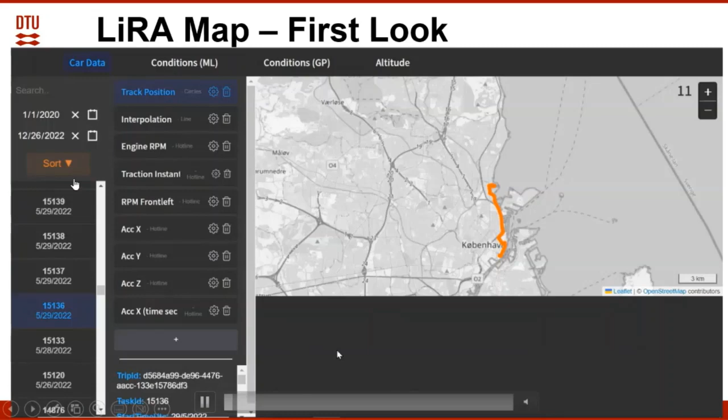Just as a teaser, I can show you the first look at the LIRA map. Here you have the trips, different trips from different customers, and here we have different sensor data coming from the car.

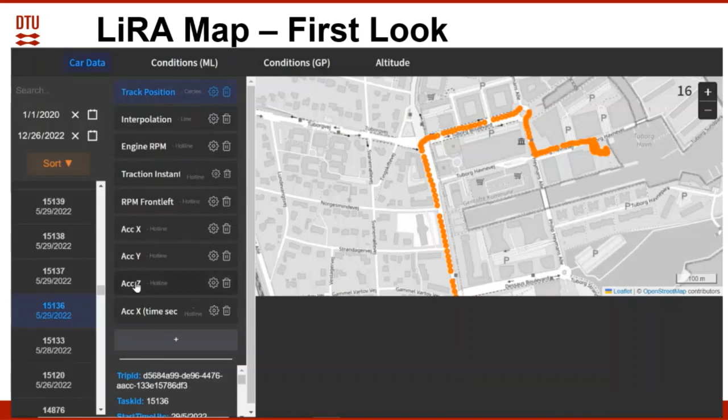Here is an example of one trip. You can see the beginning and end, and you can choose what type of sensor data to look at. For example, this is the accelerometer that records accelerations in the vertical or Z direction. By pointing at different locations on the chart, you can see where this data was collected from.

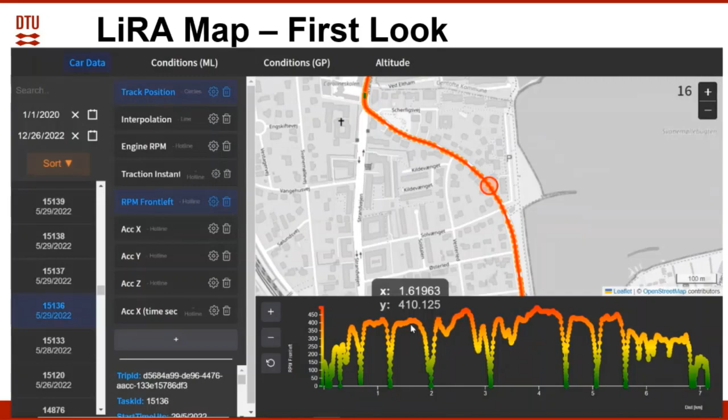Another example is looking at the RPM of the front left tire. Here the numbers indicate the revolutions per minute experienced by the front left tire of the Renault Zoe for this particular trip. So in effect, we have harvested data from many trips, and these are all georeferenced given that we have a GPS in the cars.

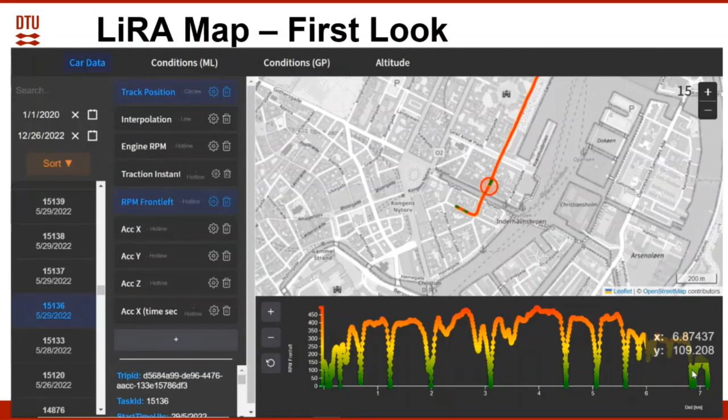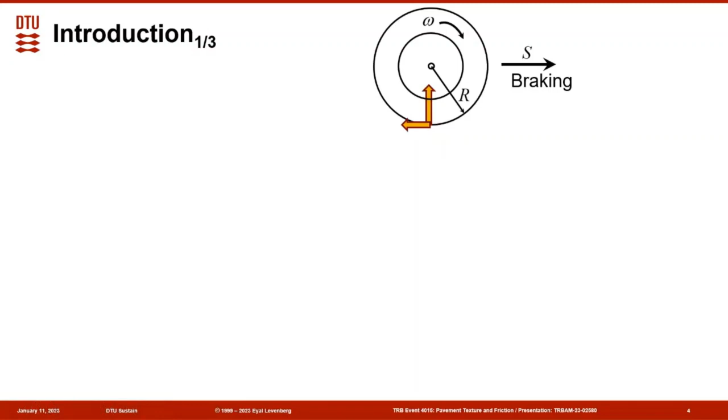As a means of introduction, here's a wheel that is moving at a speed s towards the right, and it is rotating with an angular velocity omega. The wheel has a radius r, and it is moving at speed s while braking. These two arrows indicate the forces that the wheel experiences at the tire pavement contact, which are the same forces experienced by the pavement. The friction coefficient is the ratio between the horizontal force in the direction of travel and the vertical force that comes from the self-weight of the vehicle.

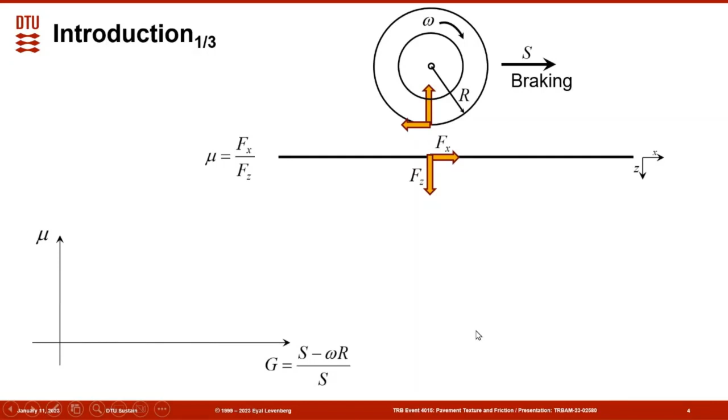It is commonly known that if you plot friction versus relative sliding, defined as the moving speed of the wheel minus the moving speed calculated based on rotation, that is omega times r, normalized by the actual speed of the wheel, you get a trend of increase reaching a peak and then decreasing again. Relative sliding equal to 1 indicates that the wheel is locked, where omega is 0, and the speed normalized by the speed gives you unity. This also gives us the friction coefficient at locked wheel conditions.

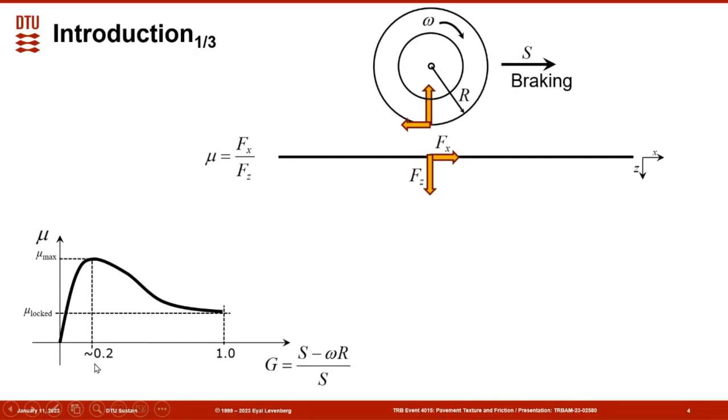The peak normally happens at around 20% relative sliding, and this is mu max, which is what I refer to in this presentation as the tire pavement grip potential.

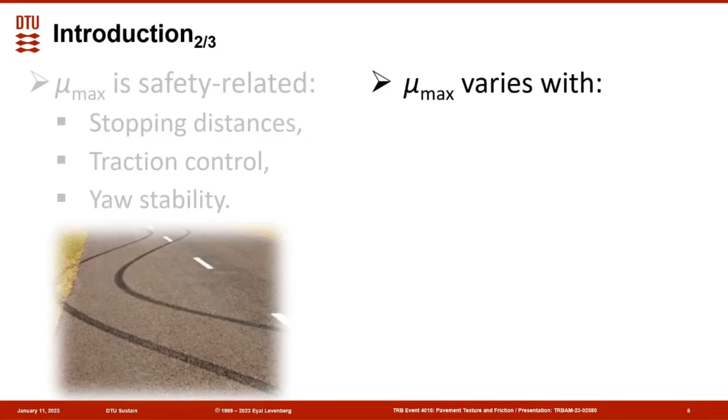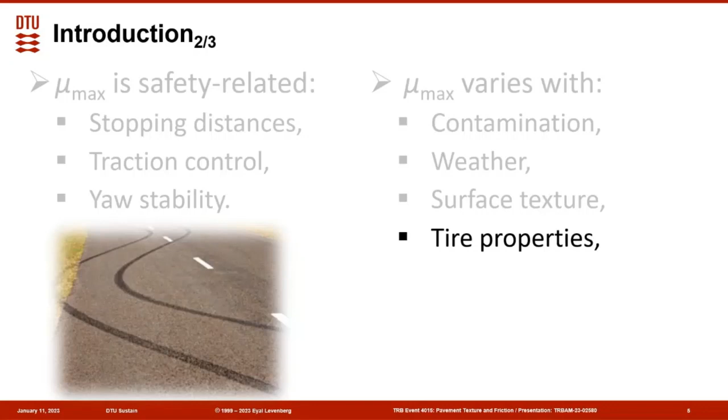The tire pavement grip potential, or mu max, is a safety related feature. It controls stopping distances, traction control, and yaw stability. Research is showing that mu max varies with contamination at the pavement surface, at the contact patch of the tire with the road, weather conditions, surface texture of the pavement, tire properties, vehicle speed, and also changes over time with pavement usage as pavements age.

The current most common technique for monitoring mu max in a pavement network is to perform periodic skid resistance campaigns, for example with this type of vehicle, under wet surface and other standard test conditions. The problem here is that we have information gaps. If we look at a certain section of highway and ask how often this piece is being monitored for mu max, there could be months or even years of gaps in information.

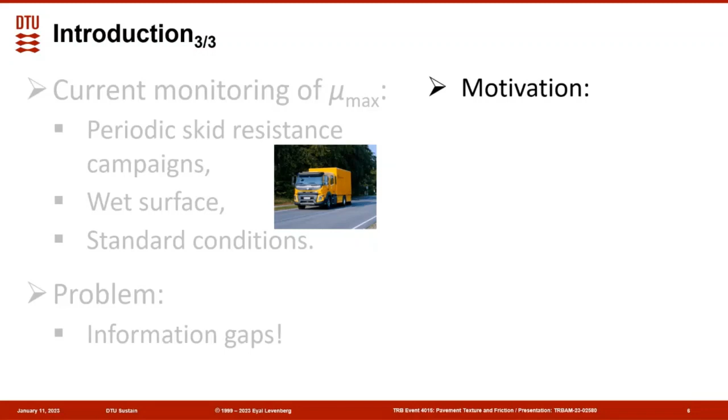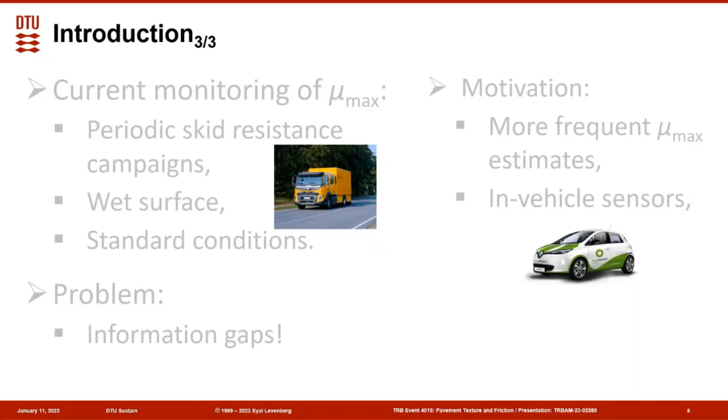Here comes the motivation for this study: to get more frequent mu max estimations using in-vehicle sensors. In our case, in the LIRA project, we use the inbuilt sensors of the Renault Zoe, taking data from normal usage of the vehicles, not asking them to perform specific maneuvers.

A review of literature shows there are two categories of mu max estimation. The first is a model-driven approach, where physics or vehicle dynamics are utilized to estimate the friction at the tire-pavement contact. This works where you have high excitation driving, for example braking, accelerating, or turning, and is normally utilized for real-time analysis and feedback for different elements within the vehicle itself.

The second category for estimating mu max is data-driven, where statistical or machine learning methods are applied. Normally this is done with special sensors, like sensors embedded in the tires, microphones listening to the sound emitted at the tire-pavement contact, or installed video cameras. These are not normally available in vehicles in general.

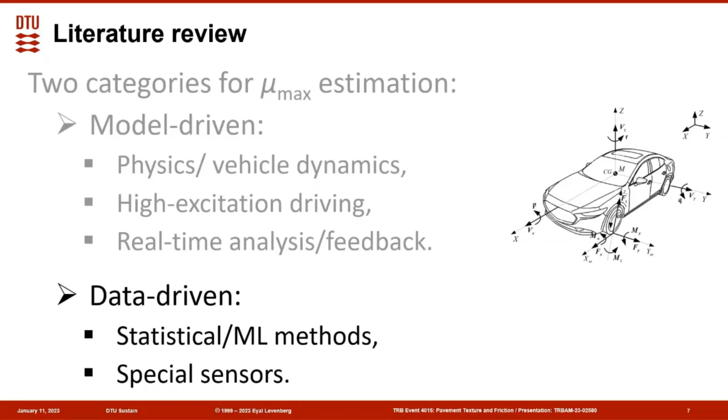The specific objective of this study was to outline and validate a new data-driven method for estimating mu max, based on in-vehicle accelerometers. The choice of accelerometers is because they are easy to install, also post-production, especially if there is no access provided by the car manufacturer to the inbuilt accelerometers—we can always install our own afterwards. Another objective is to have the method applicable to low excitation driving, meaning highway conditions where cars drive along a straight line without maneuvering, braking, accelerating, or turning.

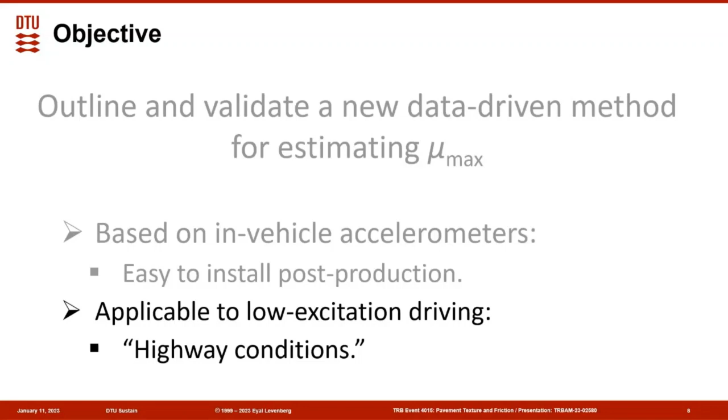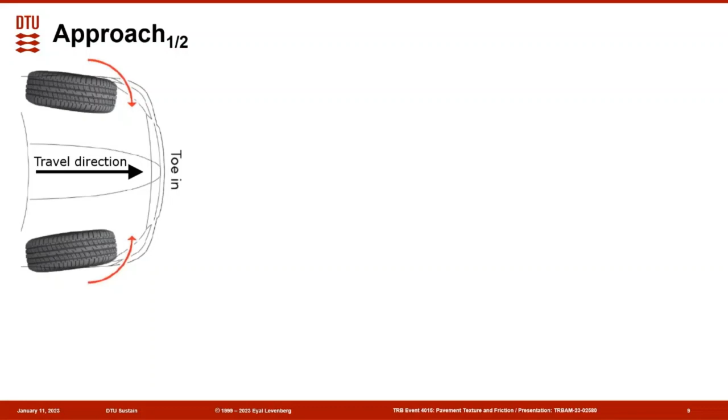The approach this study has taken is based on the idea that all cars have a toe-in setting, meaning the wheels are not parallel to each other and do not point in the driving direction, but point a bit inward. If we look closer, here we have an arrow indicating the actual travel direction of the vehicle, and here an arrow indicating the wheel heading, with a small angle between them.

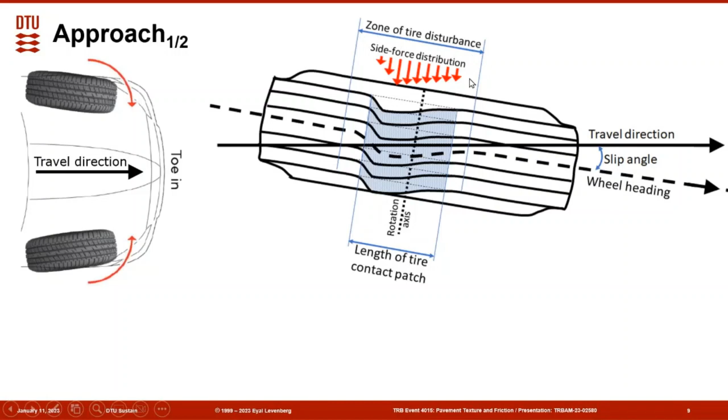This angle is called the slip angle, and because of this the tire treads, shown here schematically, are distorted. This distortion happens because the wheel would like to continue in one direction while the vehicle travels in another. This distortion actually happens at the tire-pavement contact and slightly extends over that zone of contact. Here you can see the side forces generated because of this slip angle, and the zone of disturbance is shown to be slightly larger than the length of the tire contact patch.

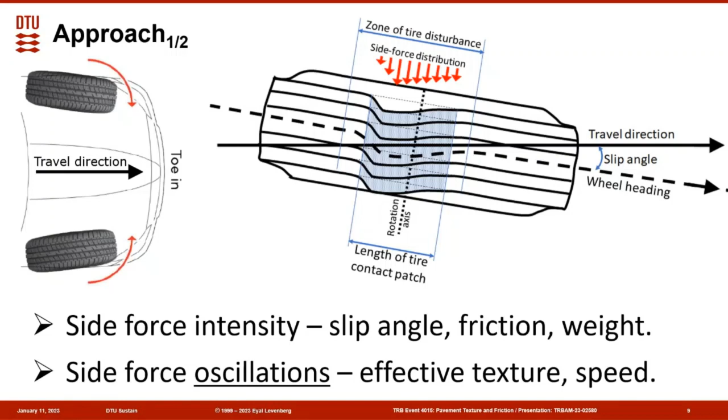The side force intensity is a function of the slip angle, the friction available between the tire and the pavement, and the weight exerted on the wheel. The side force oscillations—how the side force intensity changes over time—are in many ways related to the effective texture of the pavement, and also the speed at which the car travels.

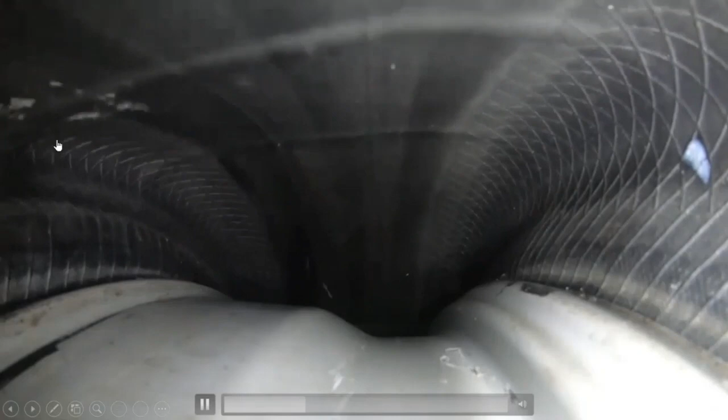Here's a short clip showing how the distortion of a tire looks from the inside. A person installed a GoPro camera inside the wheel hub. You can see the car is driving straight, but every time there is contact with the pavement, the tire deforms, and also deforms slightly sideways.

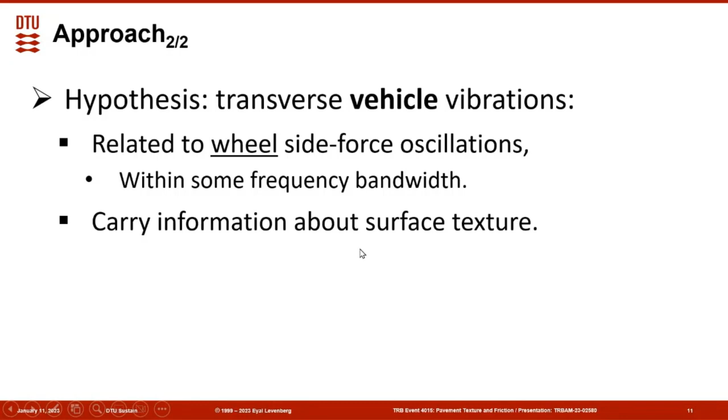So the hypothesis for this study is that the transverse vehicle vibrations are related to side force oscillations, at least within some frequency bandwidth. This means that if we monitor the sideway vibrations of the vehicle, they are related to the side force oscillations that the wheel experiences, at least within some frequency bandwidth. That means these vehicle vibrations also carry information about surface texture, and since we know surface texture and mu max are correlated, there is some link between vehicle vibrations and tire-pavement grip potential.

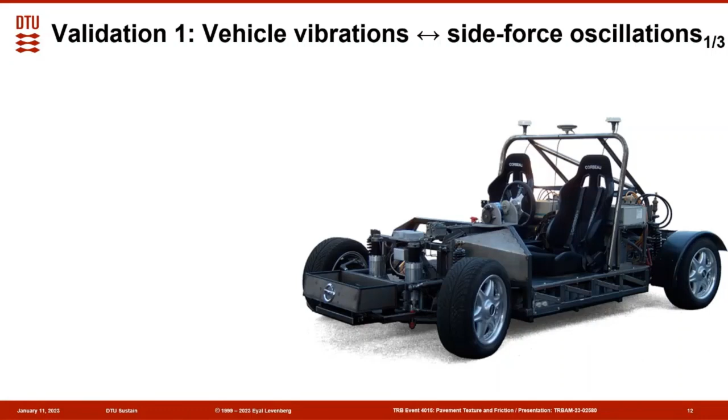In order to validate the first assumption that vehicle vibrations and side force oscillations are linked, we looked at the P1 instrumented vehicle. This vehicle is currently operating at Bucknell University, and I got permission to use the data from Craig Beal, who works with this machine. This is an electric, drive-by-wire car, heavily sensed, with all sensors collected in a synchronized manner at a rate of 500 Hertz. That's the data acquisition system they have. Specifically, the side forces are monitored with force sensors, and the vehicle also has an accelerometer that measures the sideway accelerations.

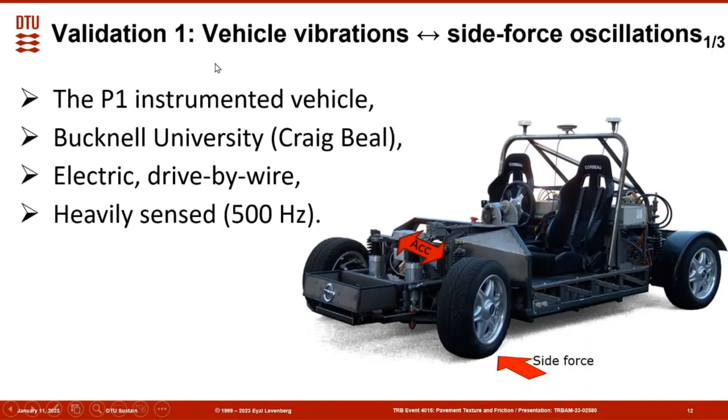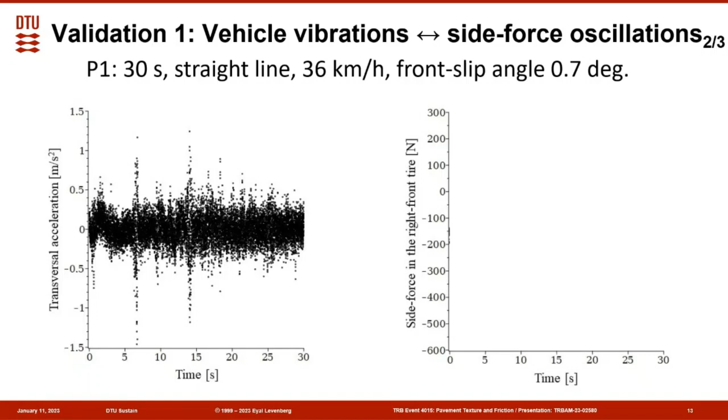This vehicle was utilized to check that vehicle vibrations and side force oscillations are linked. I took a 30-second drive of the P1 vehicle along a straight line at a speed of 36 kilometers per hour, with a front slip angle setting of 0.7 degrees. Here's how the transverse oscillations look versus time for the 30 seconds. They appear to be randomly changing between -1 to +1 meters per second squared.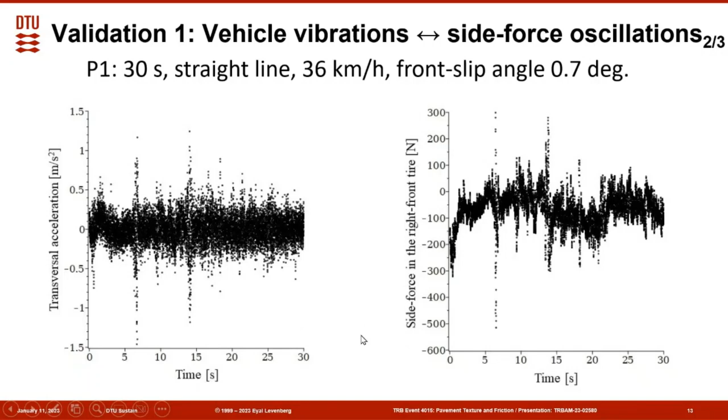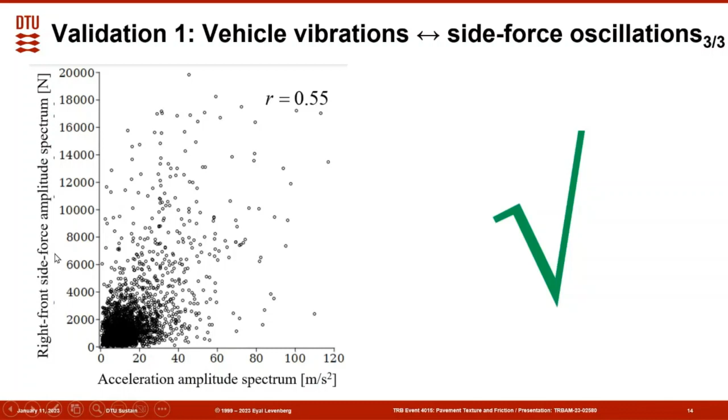And here you have the side forces recorded for the right front tire, also for the same duration of 30 seconds. So if we look at the acceleration amplitude spectrum and plot it versus the right front side force amplitude spectrum, there is a correlation between them. The correlation is not very high, but it's not negligible. It's 0.55. It's an indication that the accelerations of the vehicle are linked to the side forces experienced by the tire.

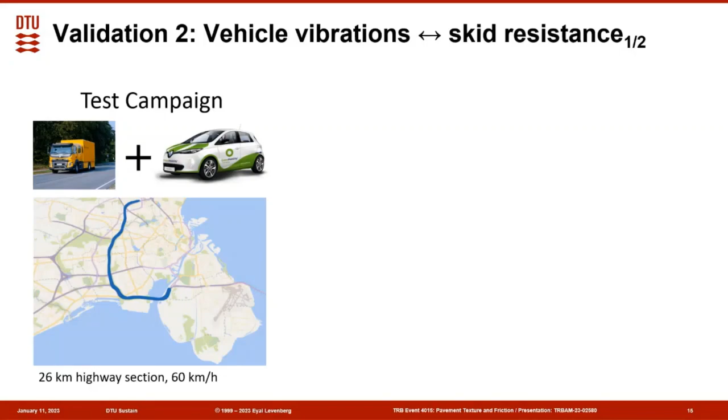Second part is to validate that vehicle vibrations are linked with skid resistance. For this purpose, we had a test campaign where we followed the Viafrik, which is a friction measuring truck, with a green mobility car, driving just behind the truck for a 26-kilometer highway at 60 kilometers an hour. The Viafrik was measuring skid resistance, and we recorded at the same time the horizontal transverse oscillations in the vehicle with an accelerometer. This is a short clip to show how this was carried out.

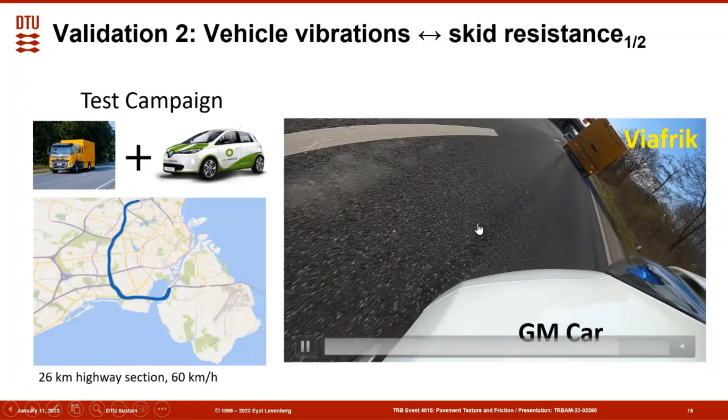So here you have the green mobility car. There is a GoPro attached to the left front of the vehicle, and it is following the Viafrik. You can also see how the Viafrik is deploying some water here, spraying water, and then at the same time measuring the skid resistance of the highway.

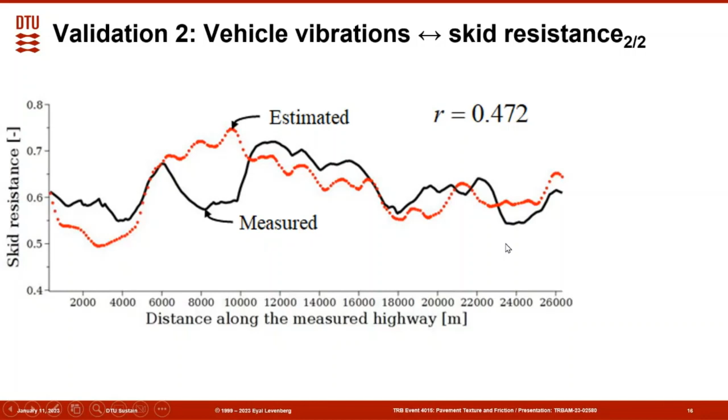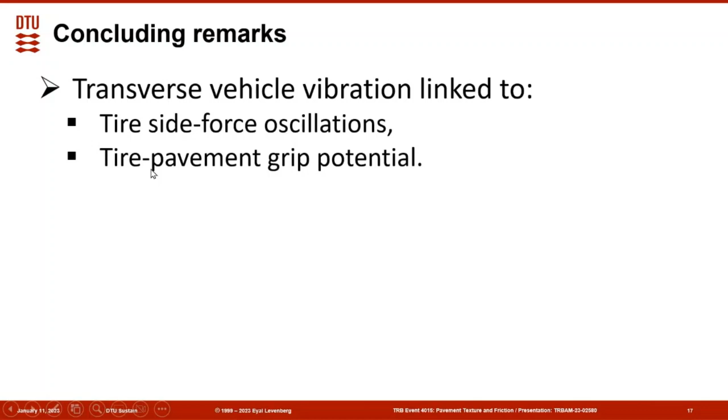So just some concluding remarks. It seems that transverse vehicle vibrations can be linked to tire side force oscillations, and therefore to tire pavement grip potential. The new mu-max estimation method is deemed potentially useful for pavement management. It's suited for highway conditions where cars are driving at a more or less constant speed along a straight line. And imagine that you have many cars and you average the results from many of them, then the quality of the estimation can be improved.

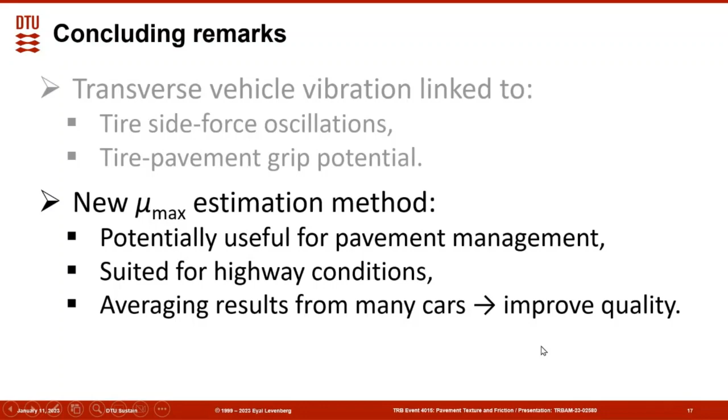I would urge you to consult the article for more details.